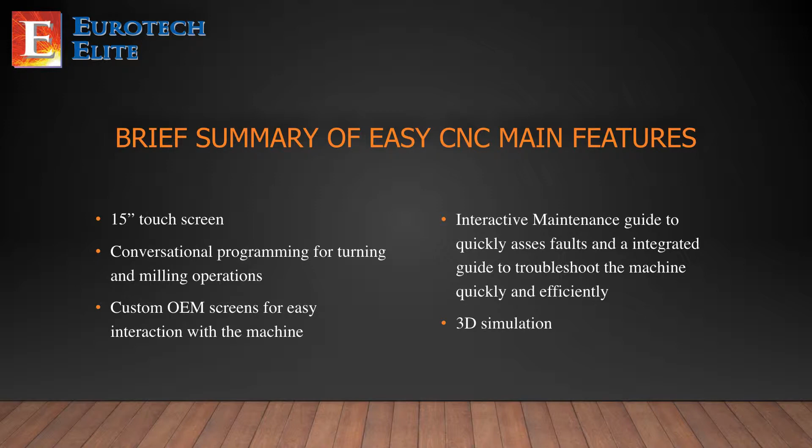And to top it off, we also redesigned existing function screens and added many more to further improve the user experience. But that's not all. We opted for latest technology to feature a 15-inch touchscreen, which allows us to pack more information in each of the many new screens that are available, well, literally at your fingertips. Let's dive right in and take a look at some of these functions, shall we?

This is an overview of all the function screens we have developed and implemented into our new Easy CNC controller. Not only did we enhance the appearance and functionality of our already existing screens like tool load monitoring, tool life monitoring, manual part catcher operation, and the CSS alternating spindle speed function screen, but also added several more to further improve the interaction with the machine. Let's take a look at some of these new screens.

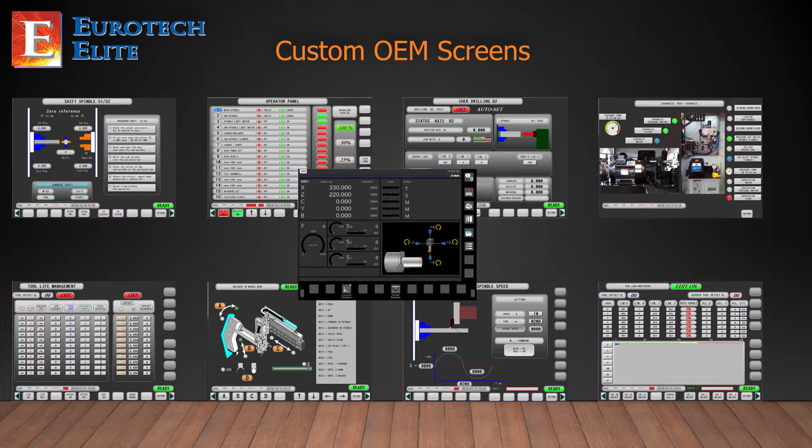What you see here is our totally revamped Easy CNC screen used to quickly and easily find a rotational displacement between main and subspindle when transferring hex stock or other than round shaped materials from the main to the subspindle. We also included detailed on-screen step-by-step instructions as a guide for every skill level operator. With the built-in process description, even a newbie can run this machine without a lot of detailed knowledge.

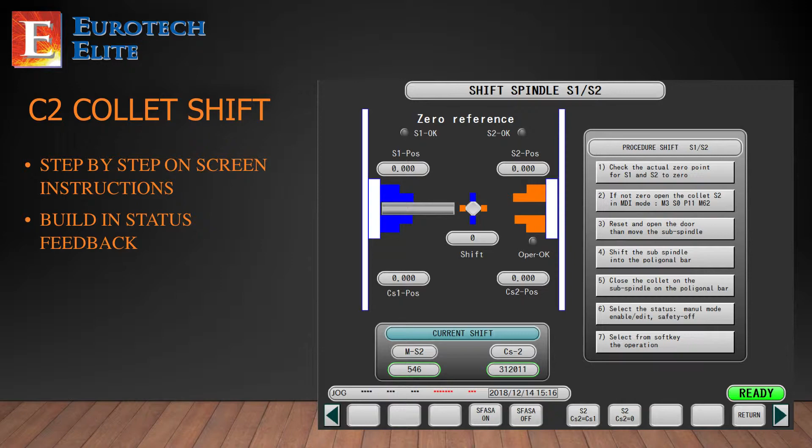For machine models equipped with the integrated multi-directional part catcher, we also updated the manual operation screen, which now features a whole list of associated M functions built into the screen for your convenience. This screen allows you to manipulate the part catcher in manual mode to check for clearance, set up proper pickoff positions, and monitor the status of each of the limit switches associated with the individual functions.

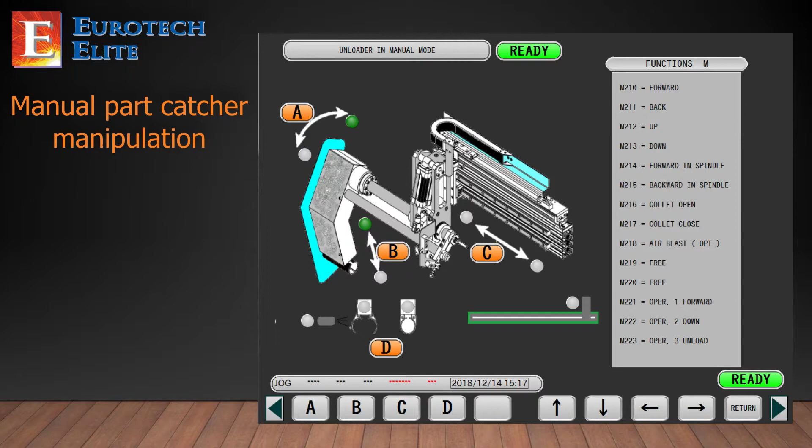But it doesn't stop there. The operator panel received a totally new face as well. Now it allows you to quickly identify each of the functions and its current status due to the added in-screen information. Each function can be easily enabled or disabled while receiving a noticeable visual confirmation.

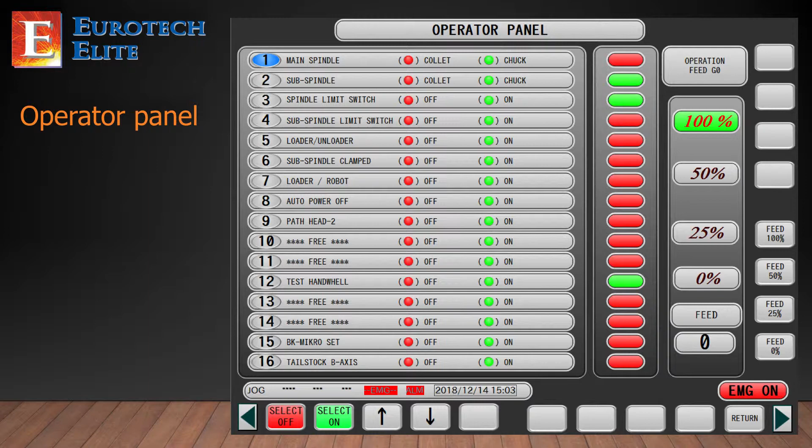But what about maintenance and diagnostics, you ask? Well, we got you covered with our new maintenance screen. The maintenance screen gives you direct access to information regarding the status and location of many of the individual systems like oil filter status, main hydraulic pressure, subspindle ejector, and the status info on many more systems right at your fingertips. And most importantly, all in the same place.

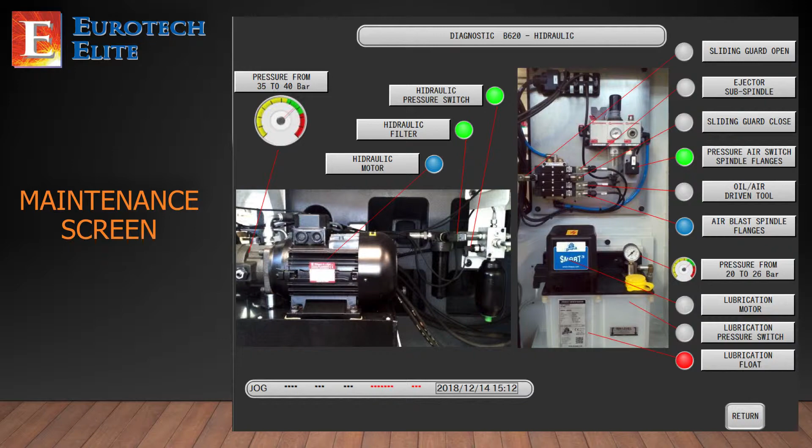So in case you do have an issue, you can refer to this screen to quickly assess the concern and use the integrated guides to resolve it efficiently. As mentioned before, we also optimized all the pre-existing screens for tool life management, tool monitoring, B2 drilling screen, and our CSS variable spindle speed function to be more intuitive and easier to operate.

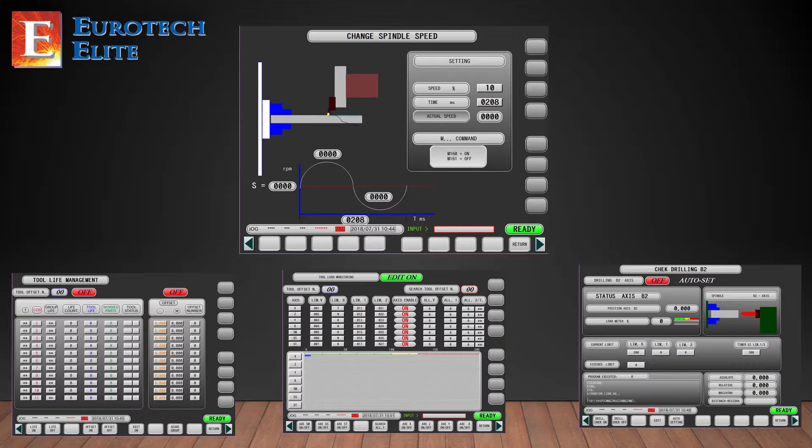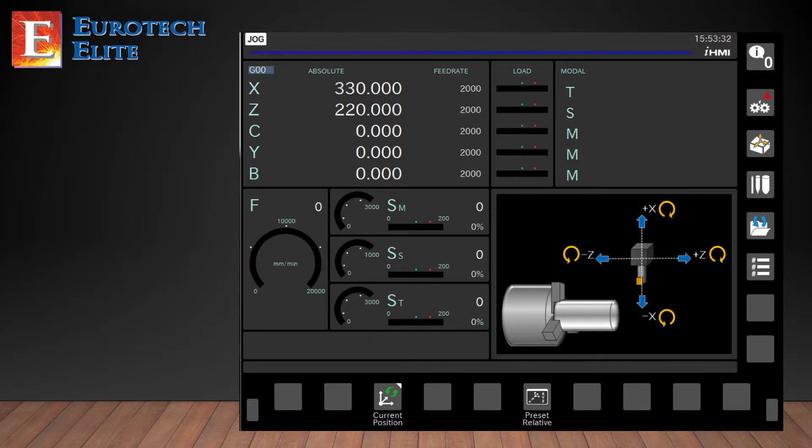For your convenience, we also added a new overview screen, displaying all important cutting telemetry data condensed in one screen, ranging from the current axis position, feed rates and axis load, active TSM functions. This screen offers everything you would want to be aware of while setting up and running parts.

With all of those Easy CNC screens I just introduced you to, along with a vast variety of Easy CNC machining cycles for turning and milling operations, we have created a powerful package to support your operators at any skill level.

Programming made easy. Thanks to these conversational cycles, such as conversational drilling, turning, grooving, and milling cycles, paired with one of the many choices of dialogue-enabled geometry cycles, a complex part program can be created in a few keystrokes.

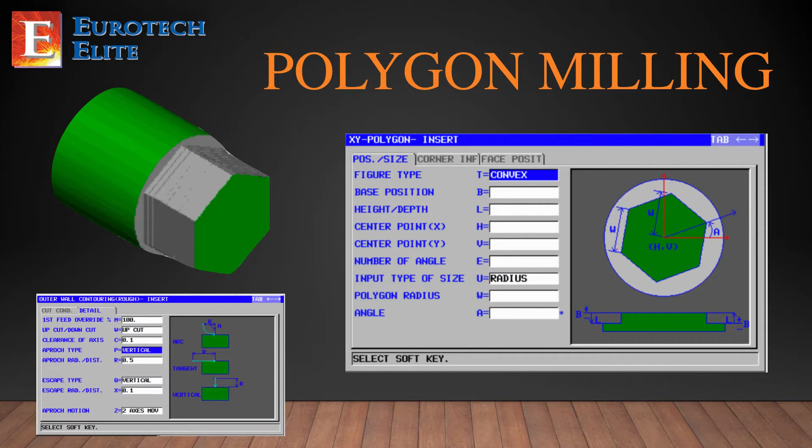To highlight a few, we now have a Polygon Milling cycle where you simply key in how many sides your contour has, either the width across parallel sides or the edge to edge length, add a center point, length, and starting angle, and you have defined your polygon shape and its location. Furthermore, it also allows you to pick between a chamfer or radius on the transition points and how you would like to approach or depart from the milling path.

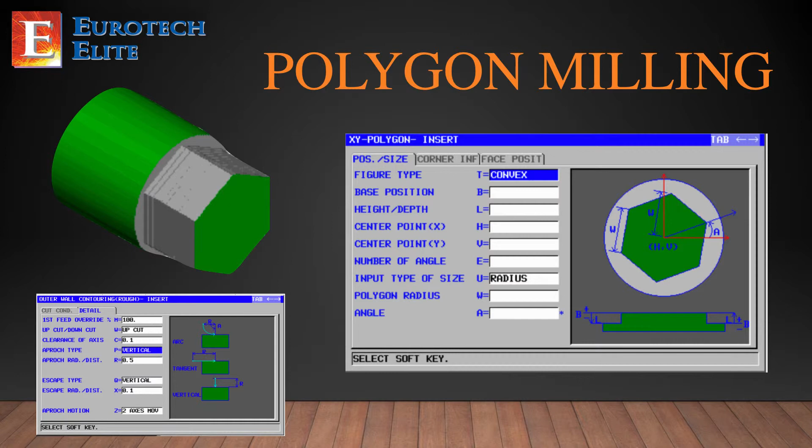Another good one is the threading cycle, which has multiple different cutting modes, needing only 5 inputs to define the whole geometry, and is capable of automatically calculating the thread depth based on the diameter and pitch you keyed in.

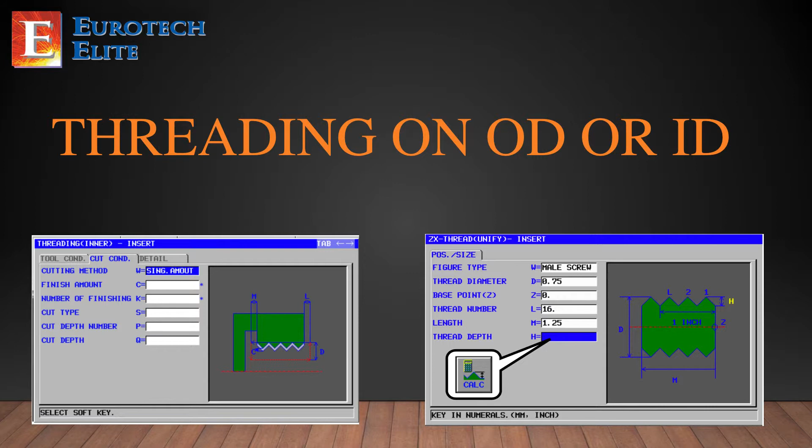But what I personally like the most is how customizable this controller is. For example, you can create and store your personal code sections within a function called fixed forms. Once configured, you can select from that list the code you would like to add to your program and simply insert it with a single keystroke. This function alone saves you writing a lot of repetitive code and gets you quicker to a complete program.

Take the tool change sequence for example. Wouldn't it be almost always the same code? Except, well, the actual tool number, right? This is how you would go about adding a fixed form for, let's say, a tool change. Start a new fixed form, name it tool change, add the common code used in every tool change, and just use a question mark instead of the station and offset number behind the T command. Once inserted into your program, simply replace the question mark with your desired tool number and you're all set.

To take this further, you could also add personal code for, let's say, a cutoff sequence or a C-axis sequence. I mean, there are unlimited possibilities.

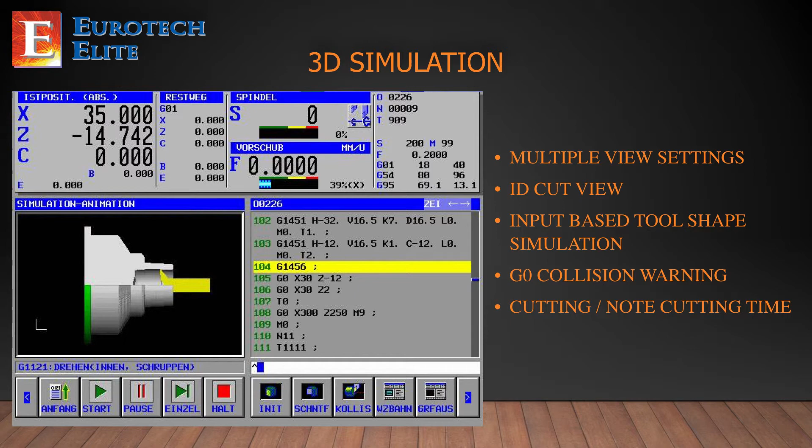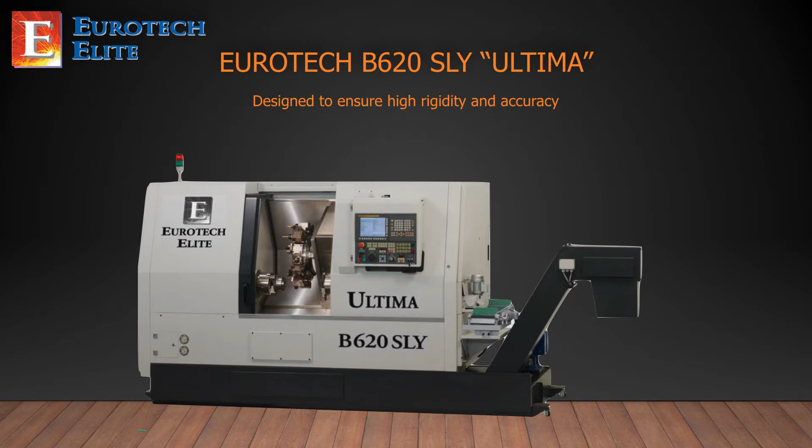All of these new features will be available with our brand new B620 SLY Ultima, the ultimate single turret machine. Our all-new B620 SLY Ultima features a massive rigid cast iron bed structure that has been reinforced by over 20% in comparison to previous designs. The new turret layout involves a 15-station design housing a direct drive for live tool operations with 18 horsepower and 6,000 RPM, which is liquid cooled to ensure thermal stability over long machining cycles.

With two choices of spindle bores ranging from 51 to 71 millimeter and a maximum output of 54 horsepower, we created a powerful workhorse now sporting a true Y-axis design with a total travel of more than 3.5 inches equally spaced around the center line.